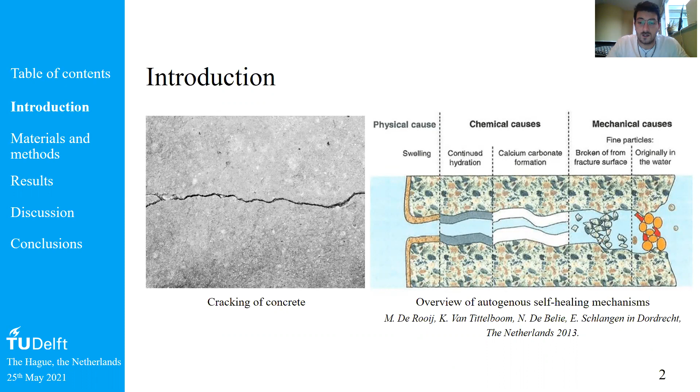The thing is that during the last 10 to 15 to 20 years of research, the scientific community determined the maximum healable crack width that concrete is able to self-heal, that is, in general, around 100 to 150 micrometers, of course, depending on many interrelated parameters related to the mixture.

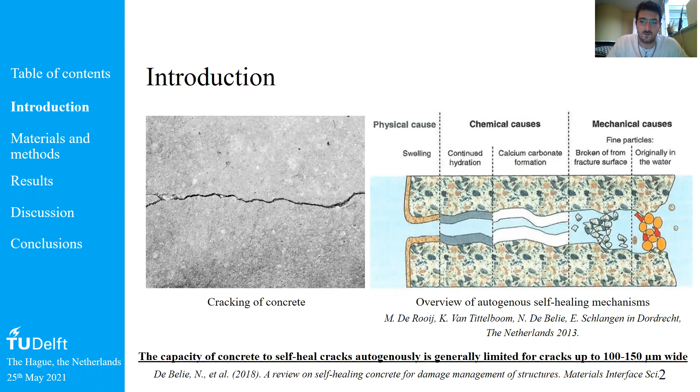Therefore, since self-healing of concrete might theoretically improve a lot the service life of our infrastructures, a lot of research has been spent during the last years to try to improve this self-healing capacity of concrete through many different technologies, such as including fibers in the matrix, to limit the crack width to one healable by the concrete, or encapsulating many different types of healing agents that can release a certain healing agent as soon as the cracks occur, and then fill up the crack.

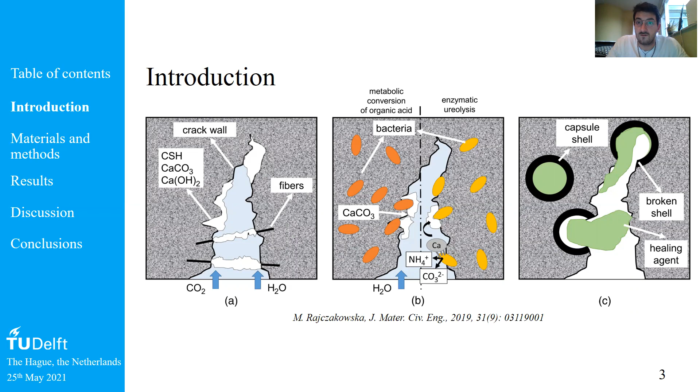And also such as through embedding in the matrix bacteria-based self-healing agents. So by including bacterial spores and certain nutrients and substrates in many different encapsulating techniques, these bacteria metabolize these substrates and cause precipitation of crystals that can fill up the crack. And this is the major group that we're going to talk about today.

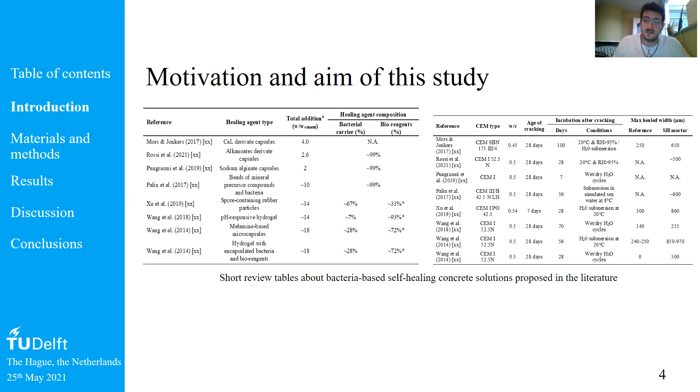And also on the right, we can see that most of the healing agents proposed in the literature have been applied in Portland cement based mixtures. And what we're going to do today is try to evaluate the applicability of a precursor that is PHA-based, that is made of wastes that are processed beforehand, so it is theoretically more environmentally friendly than other techniques proposed in the literature, and this part is going to be presented today.

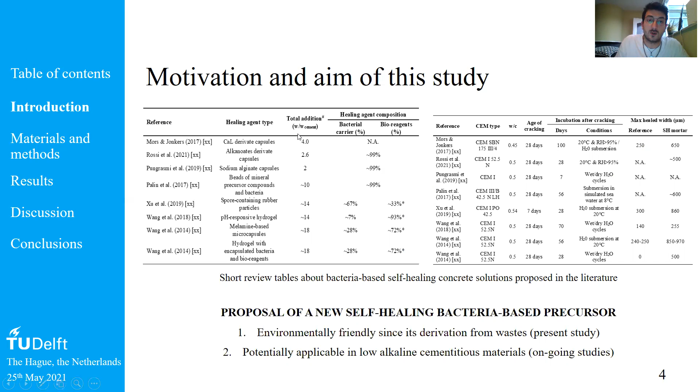And this substrate is also potentially applicable or compatible with low alkaline cementitious materials, and this is part of ongoing studies that is not going to be presented today, but just as a potential further application and benefit of this healing agent.

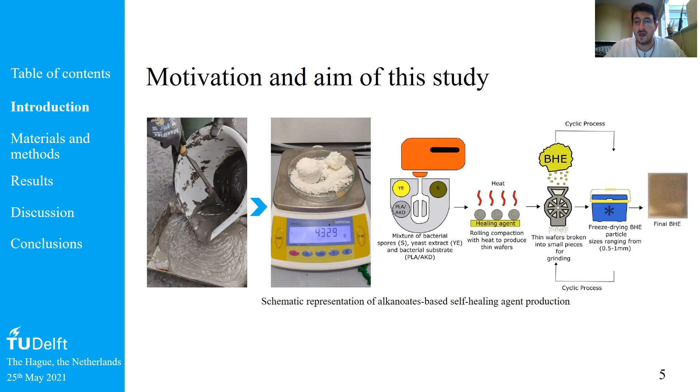What we do with our healing agent that is PHA-based is basically that we get biomasses from wastewater plants, such as those that you see on the left side of the screen, and then through certain bioreactors at the Faculty of Applied Sciences, we get this bioplastic that looks like the powder in the second picture from the left. Then we merge this bioplastic with nutrients for the bacteria and bacteria spores, and through a certain production process we get the final healing agent that is powder-like, generally between 0.5 and 1 millimeter in dimension. And then we embed this healing agent into the matrix while we mix our specimens.

And well, in order to evaluate the applicability of these healing agents, a former PhD of our department at TU Delft, Eirini Tziviloglou, proposed 3 factors, let's say, performance that needs to be evaluated when investigating the applicability of a certain healing agent in terms of its self-healing capacity. And these are the occurrence of mineral formation thanks to the healing agent that is included, the regain of water tightness, so the crack sealing capacity of the material, and also the evidence of bacterial activity.

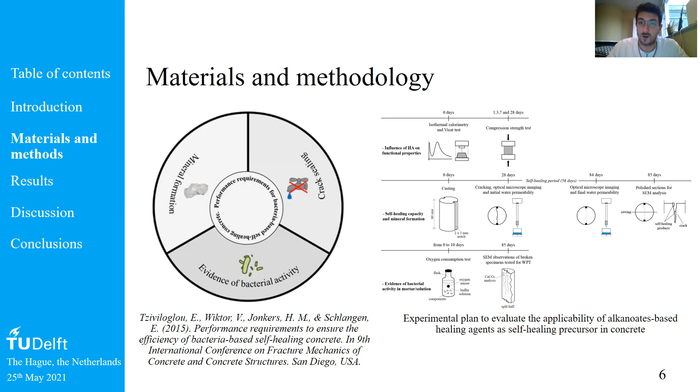So according to this, we conducted a sort of experimental plan for Portland cement mixtures that aimed to evaluate the self-healing capacity and mineral formation of this system, the evidence of bacterial activity in the mortar, and also a little bit the influence on some fundamental functional properties of the material. And that is the point that we're going to start with.

So for all these experiments that we conducted, we did 3 series: a control series that is made of plain ordinary Portland cement mortar with a water cement ratio of 0.5. A positive reference, let's put it this way, that embedded 2.6% by mass of cement of PLA or calcium lactate derivatives healing agents. That is the one that Henk, my supervisor, and also many other PhDs investigated during the last 10 to 15 years. And also we did another series of specimens with the ordinary Portland cement mortar, but including the same percentage of healing agent as the one of PLA, but with alkanoates-based healing agent. That is the one that we produce, and that is named AKD.

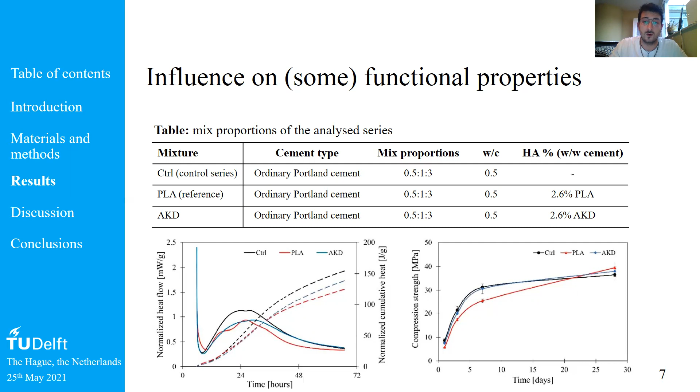Let's say the bigger influence is visible for the samples that were cracked at 6 months of age, since continuous hydration of the mortar in general gets reduced with time. And then we can see that the control series had an average self-healing capacity of around 10 to 15%, while the one of the PLA was around 40%, and we got 4 times higher self-healing capacity for AKD at 6 months compared to the one of plain mortar. So we can see how positive the influence of our healing agents included in the matrix is for cracks that are relatively big.

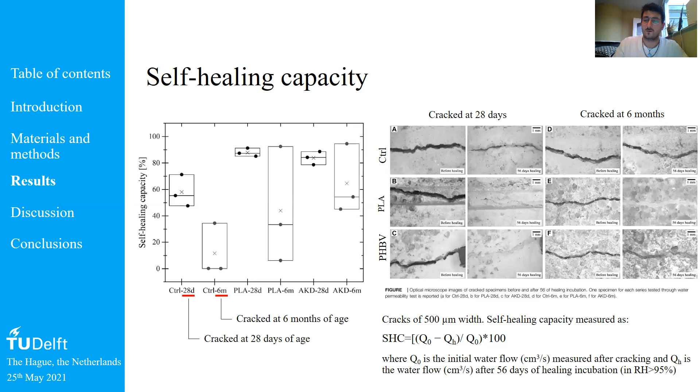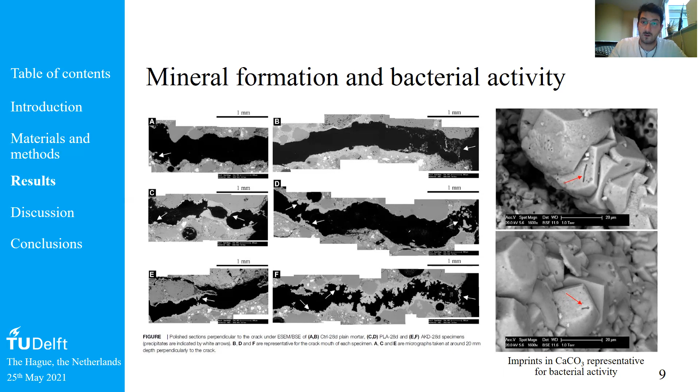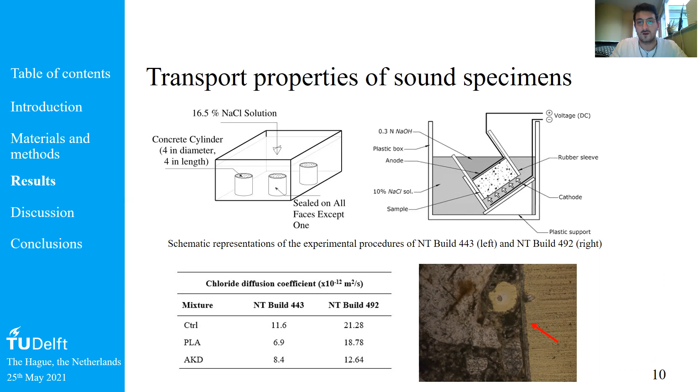So we basically evaluated quite a few characteristics of our material that could confirm the applicability of our healing agents with self-healing ordinary Portland mortar. What is also very important is that, for certain applications, especially for infrastructures that are exposed to pretty aggressive environments, such as with a high content of chlorides, it's common, especially here in the Netherlands, to use slag cements with high content of slag, such as CEM III. In a country like the Netherlands that has more than 450 kilometers of coastline, the market share of slag cement is over 60%.

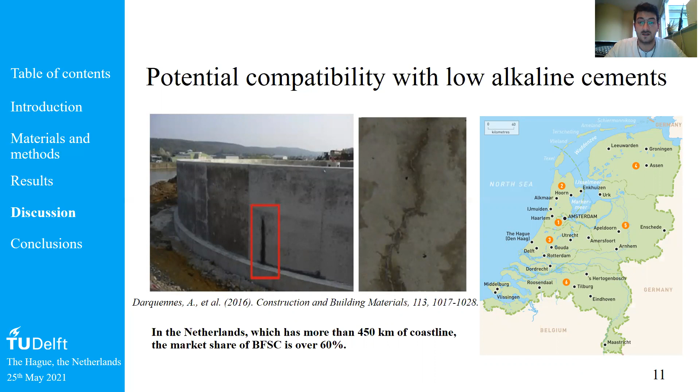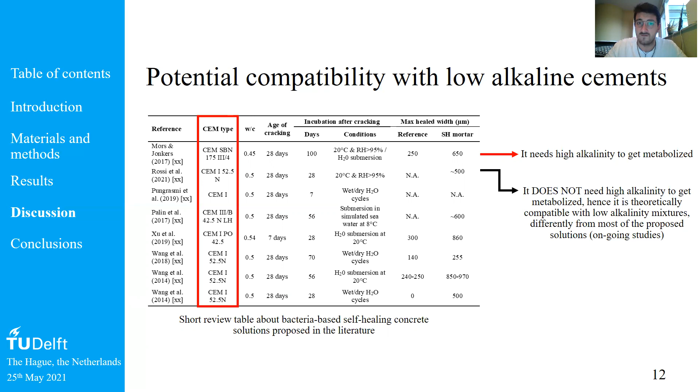However, a few healing agents that have been proposed in the literature are not really compatible with low alkaline cements. Especially the one that we took as a positive reference for our series, the calcium lactate derivatives, needs high alkalinity to get metabolized by the bacteria. While in our case, the alkanoate-based healing agent does not need alkalinity to get metabolized, and therefore is theoretically compatible with low alkalinity mixtures, which is different from most of the proposed solutions. The compatibility of our alkanoate-based healing agent and the self-healing capacity of low alkaline cementitious materials is under investigation in ongoing studies, and I hope that in the coming future I will be able to present some positive results.

So to conclude, from the present study we can say that the application of 2.6% by mass of cement of alkanoate-based healing agents, that is around 10 kilograms per cubic meter of mixture, did not negatively influence the major functional properties of Portland cement mortar. The applicability of alkanoate-based healing agent has been demonstrated through the three factors proposed earlier to evaluate the applicability of a self-healing technology: mineral formation, regain of water tightness, and evidence of bacterial activity.

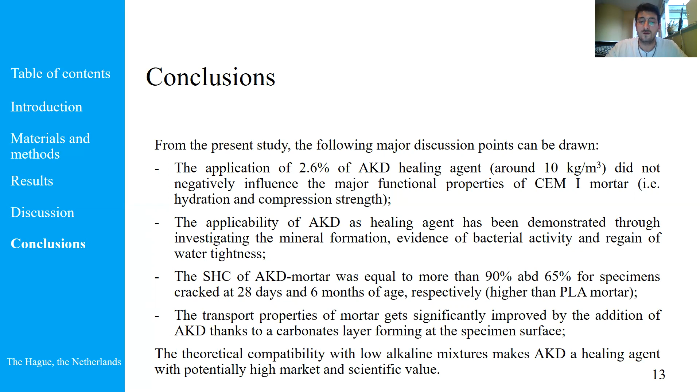The self-healing capacity of alkanoate-based mortar was more than 90% and 65% for specimens cracked at 28 days and 6 months of age, and it was higher not only than plain mortar specimens, but also than the positive reference specimens. The transport properties of mortar get significantly improved by the addition of AKD, thanks to a carbonate layer forming at the specimen surface. And the theoretical compatibility with low alkaline mixtures makes alkanoate-based healing agent potentially of high market and scientific value.